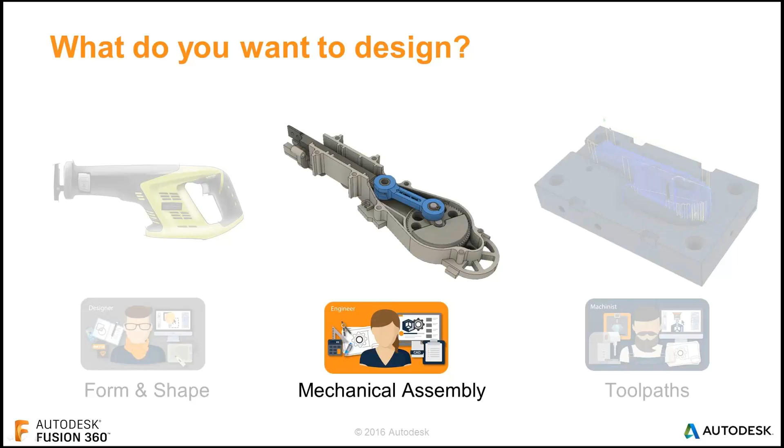So let's start off focusing on mechanical assembly. Today we will be focusing on developing the internal elements, or at least a couple of the internal elements, of the assembly of the handheld reciprocating saw that we did yesterday.

We will begin by creating a component. Now let's just talk a little bit about the concept of Rule 1. It seems to have appeared on the forums a few years back—the idea that you would start off by creating components inside of Fusion before you start building the geometry. You define the components. This is something I go back and forth on.

The reality, to my way of thinking, is that Fusion 360 is most valuable in its flexibility—the idea that you can start creating right from the outset without pinning yourself into a corner. There are definitely advantages to approaching things from the idea of creating a component, and we'll take a look at this more in depth in a moment. But a key element to keep in mind inside of Fusion 360 is the concept of bodies versus components.

Bodies are a collection of features. The thing you see on screen in blue, the crank arm, is a body. It's made up of some extrusions, a couple of fillets, maybe a hole feature. So the thing that defines the shape is the body. What makes it able to be joined in an assembly and have individual part drawings made from it is the fact that it has been defined as a component.

Now what makes that a little bit special is thinking of the context of the timeline. Just to plant the seed, when you look at the timeline of your overall design, yesterday we did everything in one space, so we had this very elaborate timeline. In the mechanical environment, when you look at the top level components, you will see all the features that make up that design, regardless of the number of bodies or components.

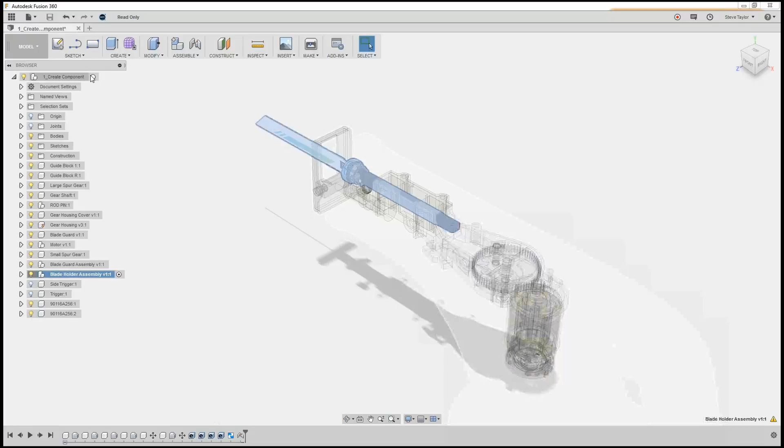You will see the timeline only displays now the features I used to develop this particular shape. And if I go back to the top level of the design and activate it - back up to the top to activate - click it, you'll see that the whole timeline comes back again.

So to create a new component, I have a couple of options available. You can create a component while creating geometry, a bit like yesterday using an extrude command or revolve command - you've got the option there to create a new component straight away. I can, in the assembly drop-down, create a new component here, and it tells you it'd like a new component, or you can go to any component in the browser.

Now if I wanted to on this, if I right-click, I can create a new component. If I did that, it would be a sub-component of that particular assembly. So what I'm going to do is make it under this top level. If I right-click, go New Component, you'll see in my browser at the side I've got this new component, and it is active - everything else is grayed out. If I click once, twice slowly, I can rename this. I'm going to call it Crank Arm.

Now I've got Crank Arm there. Even though the rest of the assembly is grayed out, you'll see as I hover my mouse, my cursor over it, you can reference anything that's in there. So I can pick up on an edge, I can pick up on a face. I have the ability to extract data from anything that resides within this drawing.

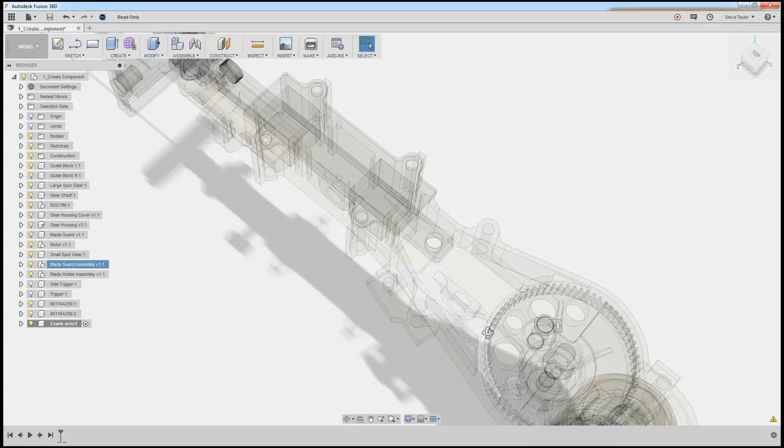The first thing I'm going to do, if I spin this round now, I'm actually going to create a crank arm between this hole here and the pin that resides there. And the way that it wants to sit, this is actually an arm that comes out, and I want to create a work plane mid between this face here and the underside face.

I don't particularly have a face that I can select for that sketch plane, so I'm going to use construction to develop a mid plane. So if I go up to the top, if I go into construct, and if I want mid plane, I can select my top surface of this arm as my first plane.

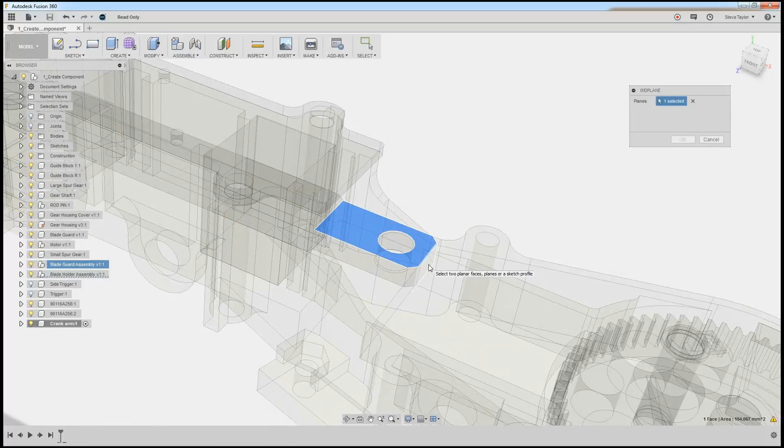Now to get my second plane, what I want to try and do is select this underside face. And you notice as I'm going across here, it's quite hard to pick that underside face. However, in Fusion, if I hover over this end one, select and hold, I actually get an option - I have a set that I can select down here. So I've released my button now, and you can see I can pick other faces that are close to that one. So I click that one there. It then has created now this mid plane between that top and that bottom face there.

And it's created that plane. Now let's start a sketch. So I can OK that, and we're going to actually start a sketch now. I'm going to be doing a circle, and I can pick my work plane, and you see it brings me right onto this work plane.

Before I said about picking up geometry from existing stuff, existing parts and components that are on here. So in Sketch itself, down at the bottom, we have a project option, and I'm going to project the inside of this hole here and the outside of the pin on that side. If I just spin it round a little bit, you'll see it's actually projected that sketch onto my work plane. So I go back to my top view and then press OK on that project.

Now I'm going to draw a circle, so I go circle, center diameter. Now again, yesterday I showed you the marking menu - what I could do, rather than having to go up here, if I right click, drag it down to sketch, and then go up to around about the 10 o'clock position, I can do center circle. Now that I've projected this geometry, I can pick up on that center, click once, drag, and I'm going to make this around about 20 millimeters. And we've got that fully constrained circle that's picking up on that center point.

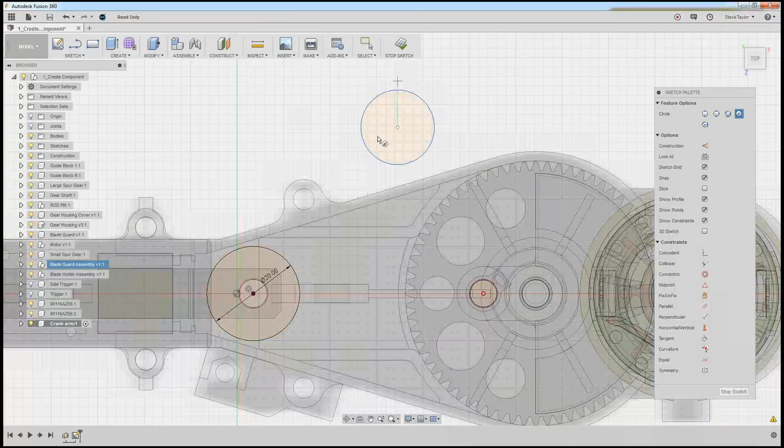Now you'll notice the shaded circle appears, and what Fusion also does, if you draw an unconstrained circle, the outline color is blue. So if I just was to draw another circle up here somewhere, you'll notice now it's shaded, obviously, because it's an enclosed area, but the outline of it is blue.

Using the sketch palette, I can pick up a constraint, so I can use the equal constraint, and I can say make this circle equal in diameter to that one, and you'll see I now get that circle constraint. I have to press escape to get out of my previous command.

Now at the moment it's still blue, because what I've got, I can still move it around, it's not constrained. I can pick up on this point, and I can just - oops, alright, held it for too long - pick up at this point and drag it. If I come to the circle there and release, you'll notice now it's fully constrained. We've got our constraints, and now I've got into the point, and the circle shape, it's gone dark.

You'll also notice the projected geometry, the colour of it is like a purple colour. So if I'm on here, the actual projected geometry, the centre, it comes up purple. So there is a bit of a colour scheme going on within Fusion that gives you an idea of

what is happening with each line that you're drawing. Now what I'm going to do, I'm going to connect these 2 points together, using the 2-point rectangle. Again, I could either come up to the top, or in the marking menu, come down and go 2-point rectangle.

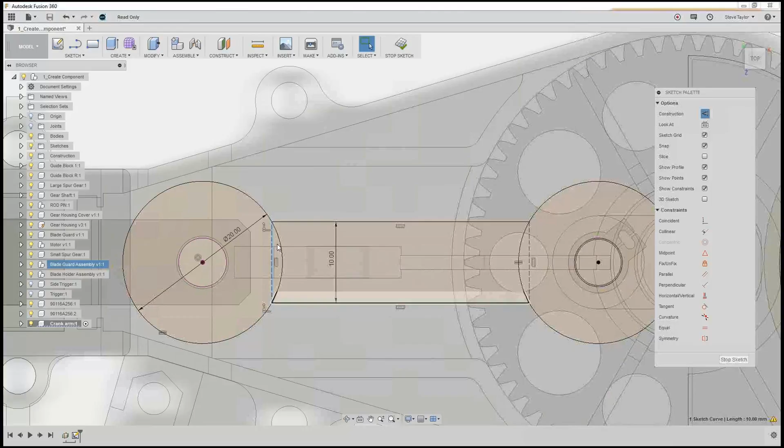So just press construct, click on the line, press construct, and it changes it. Click on the line, press construct. It gives me a blue pattern there. If I look at this now in 3 dimensions, you see how it's all connected up.

I'm going to now stop sketch. Now one of the commands that we're going to use today is the press pull. I can either put it into modify press pull, use a shortcut key Q, or if I right click, I've got press pull just there. Now at the moment it's just saying press pull on the dialog box.

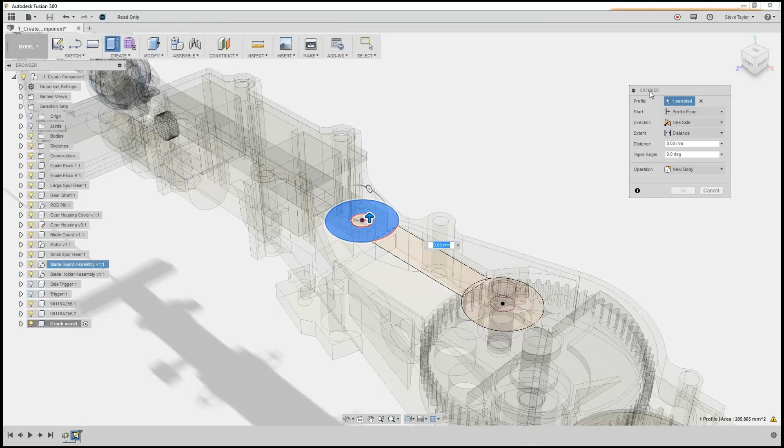If I was to hover over this circle and select it, you'll see automatically it changed to extrude. You can also use it to move faces or resize faces. It's actually a multifunctional tool, so it's pretty great for direct modeling. But it can also create features inside of a parametric model, and you can apply fillets with this same tool.

So we've grabbed this circle sketch, and what we can do is we can start to drag it up. You'll notice that we've got the same icons that we have with extrude before. We can start from the profile plane, we can offset it a little bit, or start from an object. We can go from one direction. We can have two sides where we can change one side and the other, or we can be symmetrical.

This one we're going to be symmetrical. We can either, the measurement that we put in here, can either just be half of it, or it can be the full length. I want to make sure it's the full length. And the distance that I'm going to put in here is 13 millimeters. I could have put a taper angle in if I wanted to. And you can see there, I can put a new body or a new component. We're already creating a new component, so I'm just going to leave it at new body and press OK.

Now, as usual, when a sketch is used for a feature, its visibility is turned off. So you see now that sketch is gone. But by going into the browser for this crank arm, if I open it up, you'll see I've got sketches. If I open up my sketch, you'll see that the light bulb is out at the minute for that sketch. If I click on it, the light bulb turns back on again, and now you can see my sketch, and I can select it.

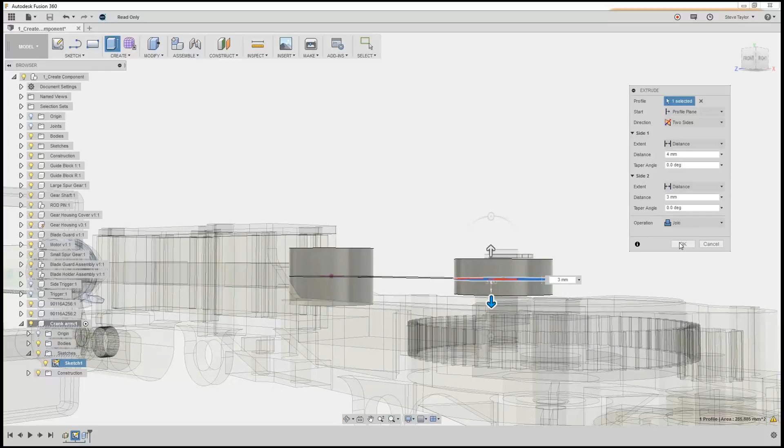What I can do, I can actually change this to join. Now even though they're not touching at the moment, because they are the same component we're working on, it will actually relate them both together. So if I press OK there, you'll notice the sketch still stays on.

For the middle, what I'm going to do, I'm going to extrude. Rather than use the press pull, I may as well just use extrude. Now I could go up to create extrude or use it from the top there, or I can just use the shortcut key E to extrude. Select the profile, and then as we're working down there, we will extrude it. Just let it check on my dimension, 6 millimeters symmetrically. So I'm going to do symmetrically, both sides, whole distance there, 6 millimeters.

And again, you'll notice it automatically went to join because the feature or the sketch overlaps some existing features, bodies that we've got in here. So it's automatically took that as a join command. Press OK. You'll see now we've got that there.

The key here is that with traditional parametric tools, where you have to declare things ahead of time - that this shall be a new component or this is going to be a new part - Fusion is different. It allows you to modify that structure. If for this arm I wanted to make it a welded part from 3 components, so this boss at the end, boss at this end, and the bar between them in the middle, I can come down to the timeline and modify each part feature to be a new component.

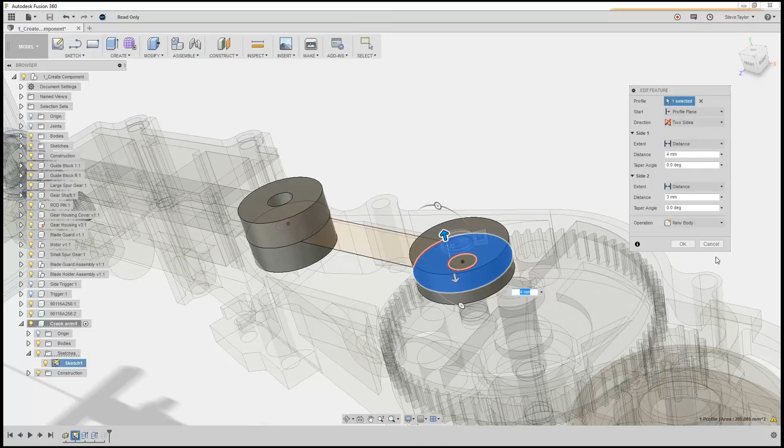If I want to change the size, want to change the distance, just double click it, dialog box. I can just change that to 8 for whatever I want to do. Change it from a join to a new body. And it does it automatically for me. So it is really a real flexible way of working.

Now what I'm going to do is turn off the sketch. So if I go back into the menu, turn off the sketch, and it's gone from it. I can just close that, collapse that down a bit for my crank arm.

This is where now we can use our press pull tool again. If I right click, go to press pull, it's asking me again, press pull. It doesn't know yet what type of press pull operation it's going to do. Selection, what I'm going to do is select this edge there. Now you'll notice straight away it goes to fillet, because Fusion, when it's seen an edge there, the type of edge it is, it automatically thinks it's going to be a fillet.

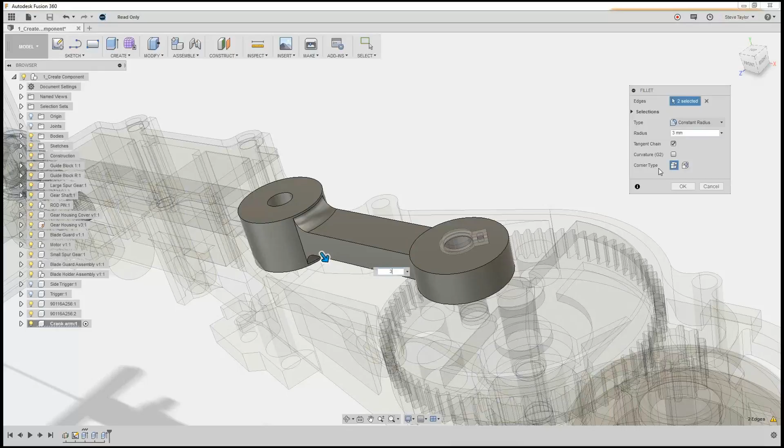Click again, the bottom face, and again I've got a manipulator arm, so I can actually pull this out if I wanted to. I've got a dialog box, so I can change that to 3mm if I want to do that. Again, on this side here, I can change it. So we've got our standard fillet operations that come in there.

So we spin that round. Now we were looking into this little bit here on this side. This time I'm going to select these 3 faces there, or sorry, edges. So again, I'm going to start the press pull tool. I'm going to select that edge, and if I hover around here, I can actually pick that edge as well. If I start pulling this out, and again, I can modify, and I'm going to actually put that at 3.5.

So you can do a lot of functions with this.

From a first-time user standpoint, it's really handy for helping someone who is new to solid modeling, who is probably going to be apprehensive with what they're trying to do. Being able to walk them through a simple exercise, we can use the same tools to develop some really cool shape. It's a nice way to introduce people to these concepts. It's a great way to break the ice and get them into being successful early on in solid modeling, without having to worry about the finer points of structure and creating a bunch of different sketches and doing all that sort of crazy thing. I think really using this is a really nice approach.

Let me do just a couple of other things here. First of all, I'm going to go to sketch, and I think what we're going to do is put a little bit of a point on here. Let me just turn this around a little bit here. If I go to sketch, slot, center to center slot, I'm going to pick on this face here. So again, I can just pick the face.

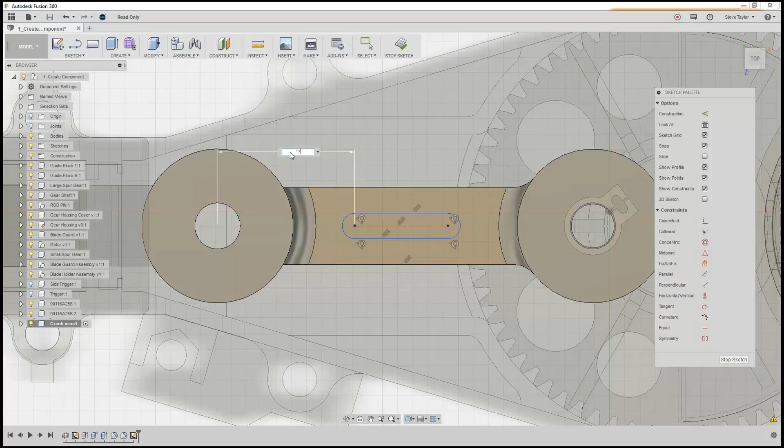And if we make that, say, 17 millimeters, it moves across that center. And then we do the same. Right click from that point to this center here, and make that one, say, 16 millimeters.

Pulls it out, and finally, if I click the outside of this, pull it down, I can make that 1.5 millimeters.

Now, one thing that I have noticed while I've been doing this, if I'm hovering around on this assembly and components, you notice how it's selecting stuff here. If I was to right click, see already it's selected that, press pull, it'll think I'm trying to do it with that part there. So what I need to do is either hover over the feature that I want to do press pull with, or if I just come off the model, right click, press pull, then I go into the selection type.

As you can see there, automatically it's picked up extrude. I've got my manipulation handles. I can start pulling it down. And for this one, let's just call it, I don't know, -1 millimeter, something like that. No, 1 millimeter. Let's do -1. We want a cut automatically, and okay. And we've now got this cut in there, which again is pretty cool and pretty easy to do.

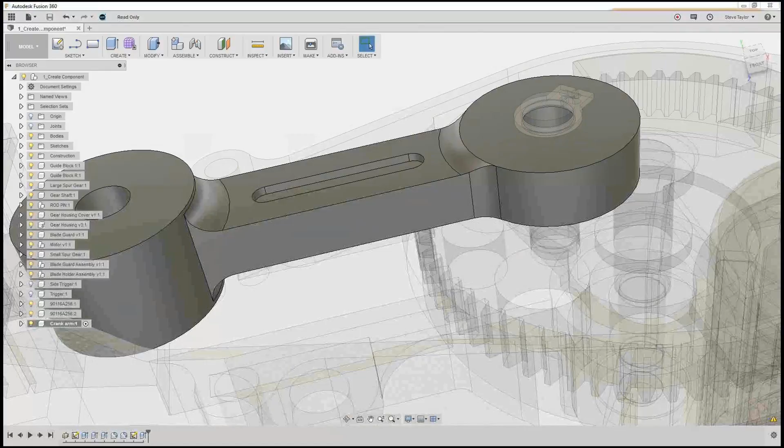Looking at some of the other tools we're going to create, we've got a mirror. Again, that little icon at the side, if we didn't see it, hover over it, you can add it to the top toolbar if you want to do. Click mirror. Now, one thing you may come up with, I was playing with this earlier on today, so that's why it came up with my last type of pattern type selection.

If I'm in faces here, I could go around and select all these particular faces to mirror. But this is a feature. If I click features, you'll notice if I'm hovering over my model itself, I can't pick that feature. However, if I go down into the timeline at the bottom, this is where I've got my extrude feature. If I click on that extrude feature, it actually selects it.

The mirror plane, select the mirror plane. I want the midpoint of my crank arm. If I just open it up, and in construction, you'll see I've got that plane that I created. I can turn it on if I want, but I can just select it from there.

Press OK, and we should now have another slot underneath. There we go. So again, pretty easy to allow you to do, and select these faces.

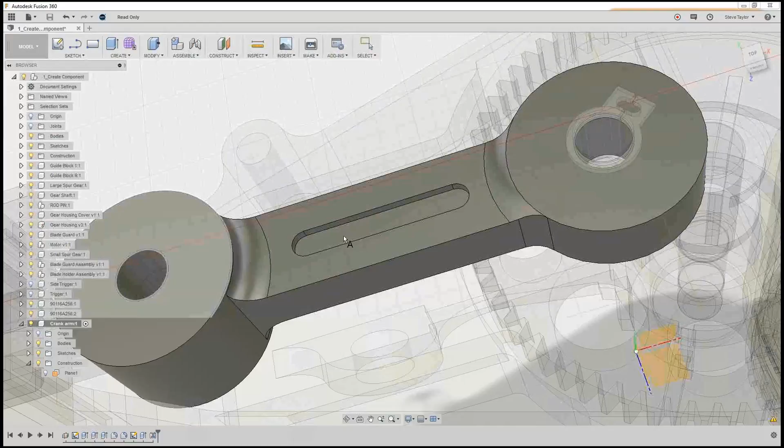Now the next thing I'm going to do is add some text in this slot. We go into the sketch, and we go to text. We can select the inside of the slot there. Zoom in.

You'll notice at this stage there's not much choice in how I can locate it. I've got this cursor that's coming up. So if I just click, specify the point for it, I can change the angle. I can type the text there. So I'm just going to type crank arm, see it comes upside down.

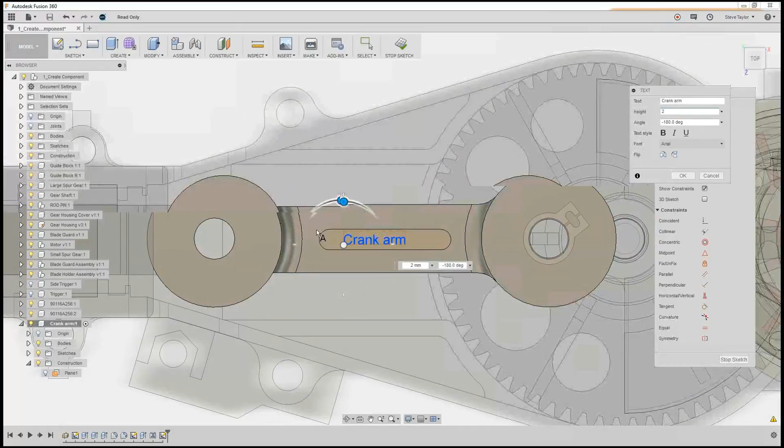I can change the angle of it there, spin it round, -180. I need to change the size of it, so if I make it say 2 millimeters, I can move it and position it.

I've got text style, I can make it bold if I want to do. There's a whole array of fonts that I can pick up. We do have access to a huge font library in there.

So once I'm happy with its position, I can then press OK. Right click off it, press pull, select the text, and again you can actually emboss it, or put it on the outside or internal outside. So I'm just going to pull this out, and bring it a distance of say 0.5 millimeters, join.

Okay, so very quickly there I've now got this crank arm with a bit of text inside, and it's pretty fancy. Not too bad, and I've not really had to use too many tools to create this. A bit of a sketch, and using push and pull as the main tool, I've managed to create something that's starting to look like a fairly decent crank arm.

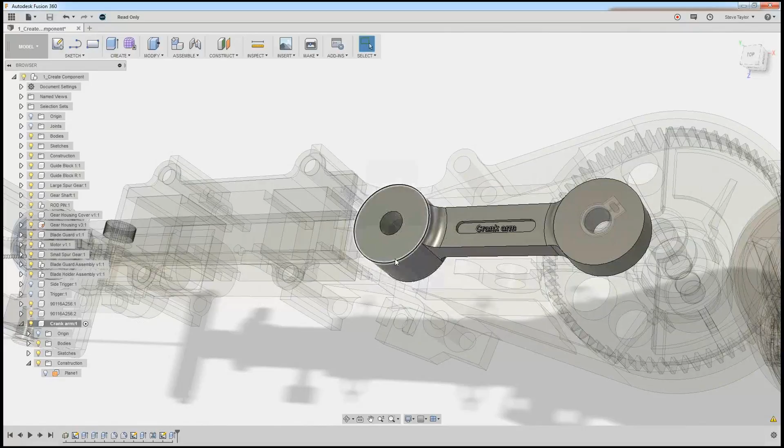Now, what we can also do is leverage other sketches. What I want to do is make a cutout now in this end, because there's an arm that goes through it. So what I want to do there is lever this profile of this sketch around here.

So I'm going to create a new sketch. Create sketch, and hopefully I can pick that face there, so I click that face. One of the things we can do in Fusion, a bit like Inventor, is actually slice on the sketching plane.

It comes up in our sketch palette, and we've got an option here to slice. If I click slice there, it will actually slice through my model on my sketch plane. So now I can actually see the arm that I need to make the cutout for.

I'm going to right click and do sketch project geometry. Again, I could actually go to sketch project geometry this way. I'm going to go that. What geometry do I want to select? So I'm going to project that bit, and then that bit.

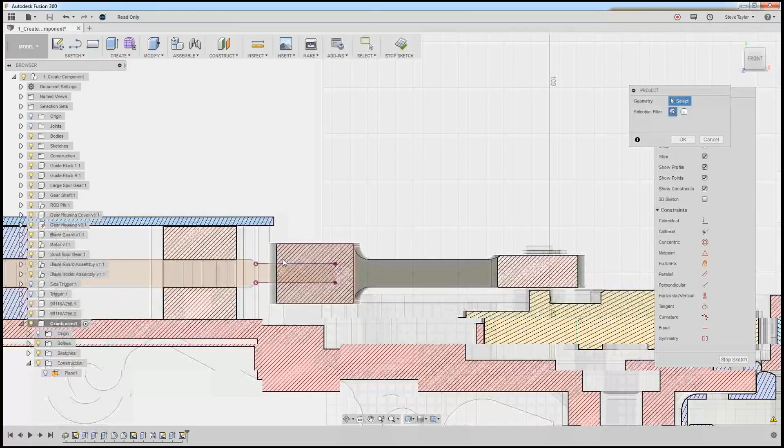Okay, if I go sketch now, what I'm going to do is a little offset. I'm going to offset these sketches that I've just done. Now you will notice if I hover over this arm, it picks up the full arm to offset.

If I hover over it again and hold the left mouse button for a minute, you'll see I get this chain. So I actually have an option of what chain I want to pick up from there. The first one is the whole arm, the second one is just the bit that we want. So if I select that, I'm going to leave that at 1.

Okay, and then using the L command for line, I'm just going to join up these at the end to make it a complete profile.

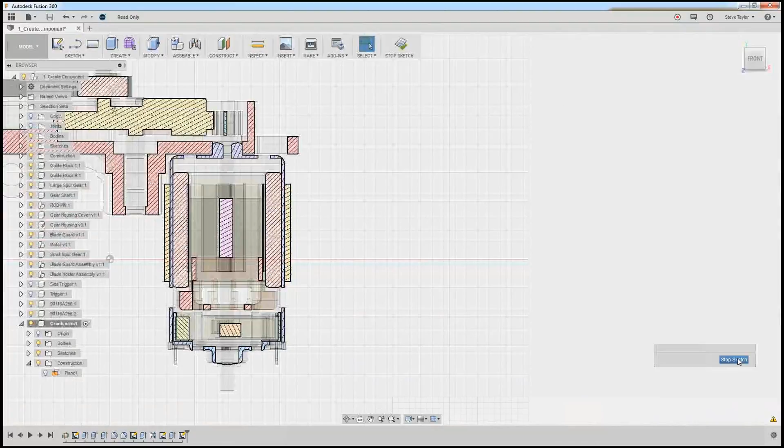Just like before, I'm going to now right click, press and pull. Now you notice because I did that whilst I still had the slice on, it's kept my model sliced. So if I just cancel out of that and turn off the sketch, we'll remove that, or I could just take the slice off and it would remove it.

Right click, press pull. I can now select pieces. There we go. Where is it? There. And that part there.

And you'll see we're now into our extrude again. Now one thing you will notice as I'm extruding there, it will actually cut through the case. So if I was to go symmetrical on both sides, you'll notice it's actually started cutting through other components. So I pull that out so it goes all the way through, and I don't want that.

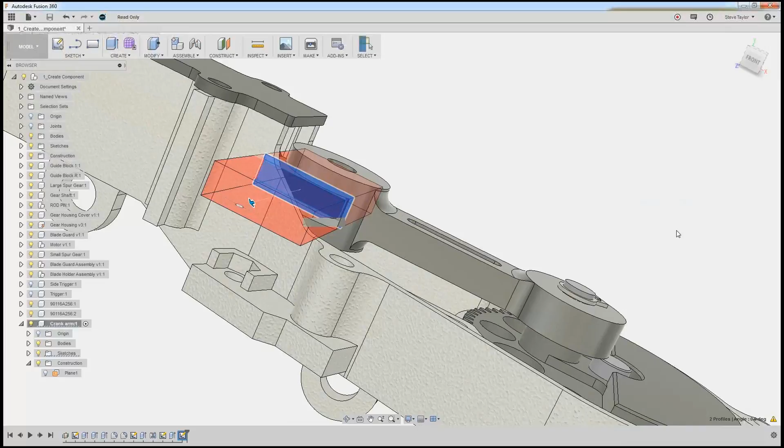What I can do here at the bottom, we've got an option for objects to cut. If I open this out, you'll see if I can remove the tick from the gear housing and from the reciprocating arm there, the casing, it will only now cut through the actual crank arm. If I go OK, it's now got this.

You will notice if I focus in on this front view down here that there is a little bit of collision between this arm and the end there. We could actually just use the press pull tool again, and if I was to just select that face, I can remove and pull that face a little bit further down.

And if I wanted to now, using the press pull tool again, I could actually add some fillets on if I wanted to do on the sides here, and press pull again. I can actually put some internal fillets in here if I wanted to. So it's quite a nice little tool for doing things like that.

So if I just zoom out a little bit and spin that round, so again, quite easy, quite a nice tool to use.

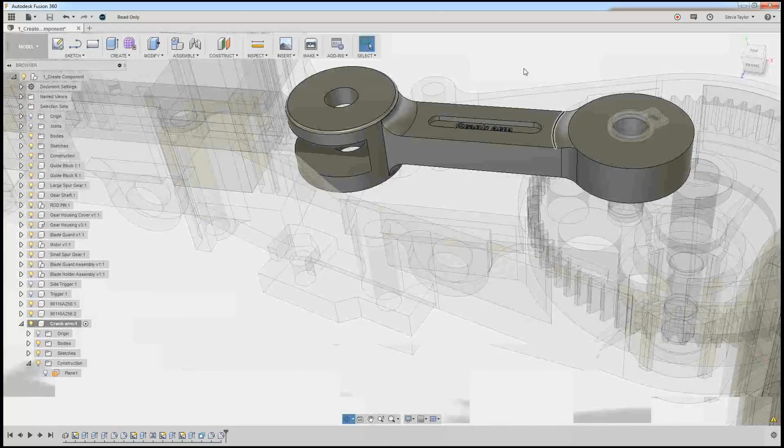Whilst we're in just this environment now, we've just created this component. What I want to do is just have a quick look at physical materials. Yesterday we looked at appearances and overrides, being able to change the colour of the model. Today I want to talk a little bit about physical material. I can right click, get physical material there and appearances there, or by going into the actual component itself at this corner, right clicking, I can go physical material. Again, it looks very similar to the appearances box we looked at yesterday.

You've got the ability to change and look at different libraries. So you can have your favorites library or non-linear material library. We've got ceramics, and if we go into metal, we've got lots and lots of aluminium before we get into the copper and other bits.

What we can do, if we wanted to make this into now, say, an aluminium, just go back up again, into aluminium and drag and drop. It's now changed the appearance to match the aluminium appearance. It's changed the colours, and it's actually put the material up into this design. And if I wanted to change anything, if I double click on this box, sorry, I might have to just move it over again.

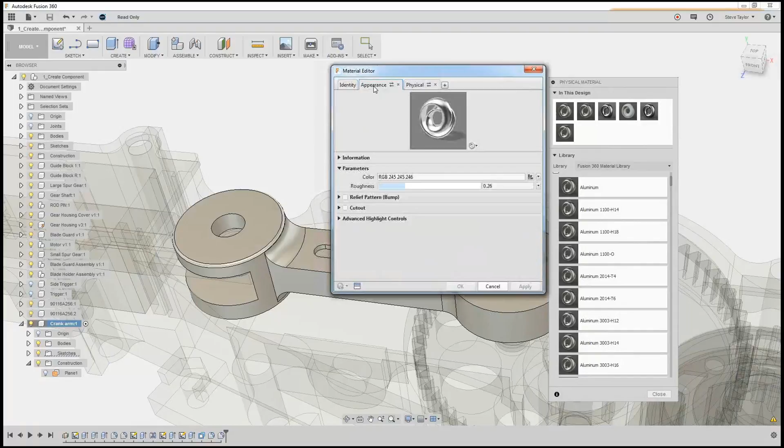Double click on this box, I can actually change like the density, get into more information about the material itself. So I can change the colour and physical appearance of it. It may or may not change the appearance much, but we have the ability to make these modifications.

You can actually copy the materials as well and create your own library. Some of the materials are non-linear, so when we get to stress analysis, depending on the material, it will allow for a different type of analysis. Some of them may not be downloaded, so you may have to download.

So again, if you're scrolling down in the library, you would get a little arrow at the side, a little down arrow with an underscore line, and that would indicate that it would need to be downloaded. It's just a quick, simple click, and it will actually download for you. So that's really just materials.

One of the things you may get if you're ever doing the ACU exam is, whilst a lot of the questions need you to measure something, whether it be the volume, the mass, or an area. If it's an area or a distance, you can use the inspect tool, measure, and just highlight something, and it will give you the loop length of that sketch, the area of that particular surface that you've got there.

If I come into the actual arm itself and right click, then go into properties, depending on the material, we've got the area, we've got the density, because we said it's this aluminium, so it's picked up the density from there, and it gives us a mass and a volume. It tells us the physical material that we're using, and there's lots of other stuff there, centers of gravities and information that you can pick up.

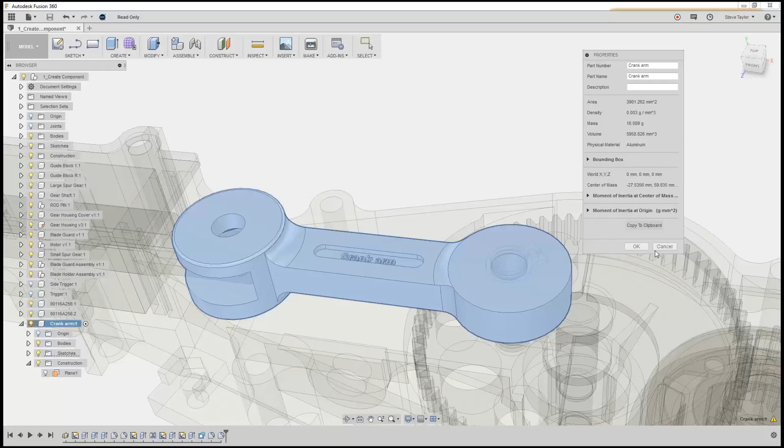So if you're ever actually doing the exam, what it wants you to do is type some information, usually out of the properties box or from the inspect. So that's just a little hint there when it's looking at stuff. So just cancel out of that.

Moving on a little bit, that's what we've just done and created. It's on this PowerPoint, a lot of it, so this will be made available to you. We've done the demonstration. The next thing we're going to look at is importing and editing existing components.

This is working from existing geometry. One of the things Fusion has the ability to do is pull data in from just about any other CAD system. Any translation, say a SolidWorks part, CATIA part, or Creo part, is done in the cloud through the upload function. So the same process you might use to go into a project, click upload, and pull in an existing Fusion file can be used to pull in data from other sources. Some of the standard formats, STEP, IGES, etc.

These can be pulled directly in by saying create a new design from file, and I'll use that process as well. Once the data is put in, if it can be automatically stitched into a solid, or in the case of a STEP file where it probably already is a solid, you have the ability to go ahead and just do direct modeling and make modifications to that geometry. You also have the ability to turn on design history, so modifications made to that model can be tracked and edited. Let's take a few minutes and walk through the process.

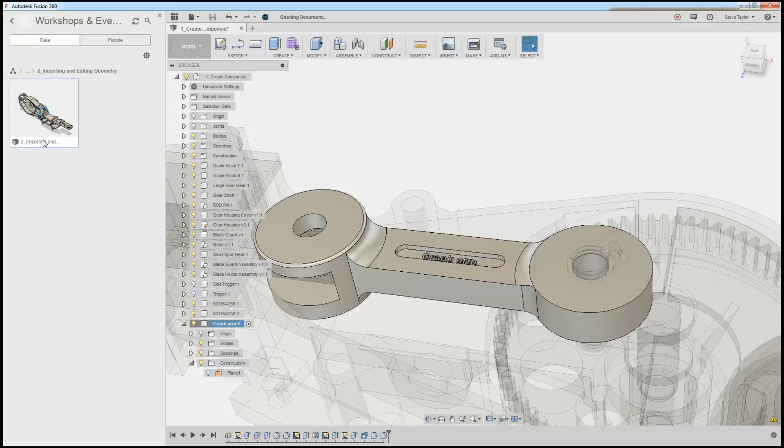So I open this, we have the file here that you can edit. But to show this technique, I have an IGES file saved on my hard drive. What I've done is upload this. But what I can do is go File, New Design from File, and what I've got on my hard drive is an IGES file, which you can see there. So I'm going to open it.

So this should now... it's opened this untitled one, which is exactly the same file, but what I've done is actually imported this one from my hard drive. And you can see it actually opened it pretty quickly, and you see it's been able to stitch it into this solid model.

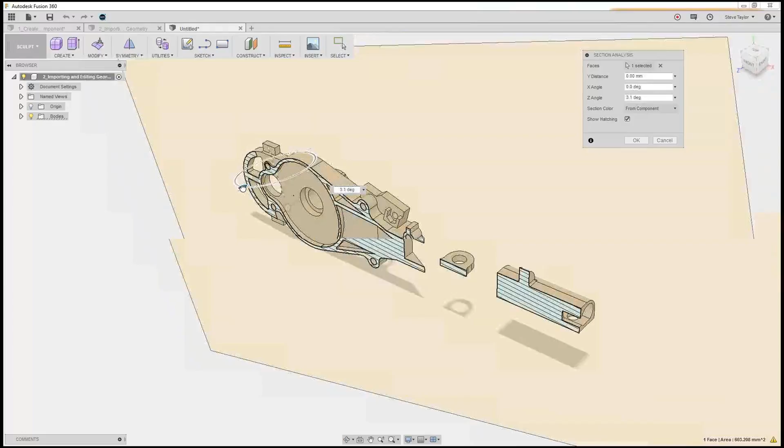If I wanted to check it was solid, I go into Inspect and go into Section Analysis, pick up on a face, and there you can actually see it has brought it through as a solid. I can spin that around, and you can see there we've actually got a solid model from that IGES file. It's a very quick and easy way to actually check that.

I'm taking a look at the body. There's lots of different things that probably need to be tweaked on it. So let's spin this round a little bit. There, we've got a couple of ribs there.

So looking at these particular ribs here, they might not be needed, and I may decide I want to get rid of them. If I select this face, depending on how I select it, I might get different results. If I select this face here and just press delete, you'll notice the whole rib has gone and the whole side has gone, which I didn't really want.

If I click on this particular face here and press delete, you'll notice it's actually deleted a certain feature, but it's gone all the way across. And if I spin it around just a touch and come onto this face here and now press delete, it just removes that particular feature, which is what I wanted.

Now, if I try to do the same on this side, just delete that face and press delete, it's actually done it, so that's pretty good. So what I've just quickly done now is modify that particular part of the model. Again, you can always undo if you've done that.

Now, one thing I am actually doing now, you'll notice I've got no timeline in here. I can at any time right click up here and capture design history and turn it on. So I've now actually got a timeline there picking up my base feature. I could have possibly undone the bits I've just done, but that'll be fine for what I need to do on this.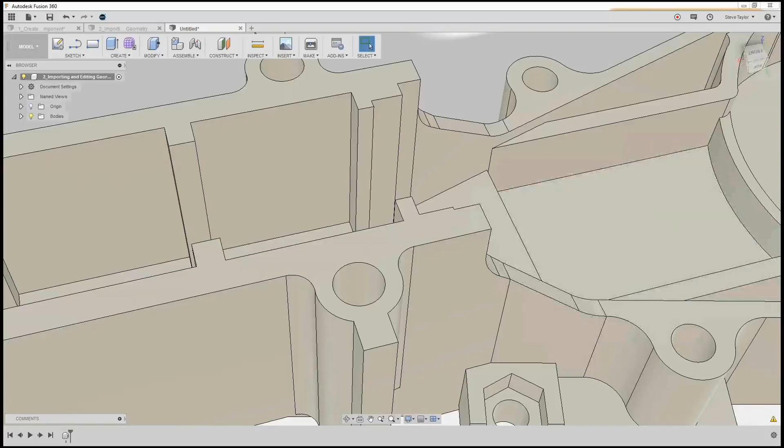Other things we can do, again, if I now move to, let's have a look, somewhere on here where we can do something. Let's spin it around a little bit. There we go. This particular feature here, yeah, maybe it's not the result I wanted. So we can play and have a bit of an experiment.

So if I click that and press delete, you'll notice it goes sharp. Same on this side, click, press delete, it goes sharp. So I'm actually now modifying this existing model.

If I was to right click, press pull, click on that edge, you'll notice I can actually change the size of that now, and it's actually putting it in as a fillet. I'm not so sure if it would have recognized it as a fillet initially, but now that I've deleted it, I'm putting it in a fillet. So it's actually making it tangential as well, because as I'm doing it, it's making sure that that is a tangential fillet to that side.

So I could actually make that, say, let's have a look what it looks like at 20 millimeters. It's a nice smooth curve. Press OK on that, spin it around slightly, then pick the same edge. Right click, press pull, same edge, and again I'm doing the same. So I'm able to modify these edges, make it more to what I want it to be able to do.

If I then look, I want to move now to the front of this, so let's come along there, let's zoom into the front here. Hopefully a lot of this is getting a feel for the actual tool itself and how it works. If I move to the front end of the model, I want to get rid of this notch in this face, this little notch here.

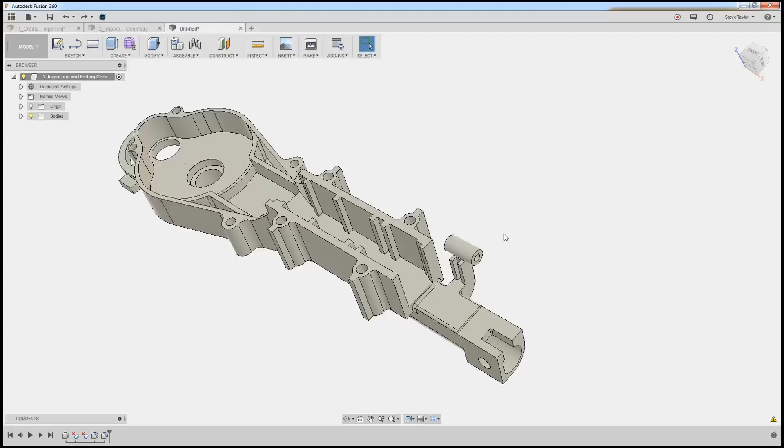Selecting the little face, so if I was to come here and just select that little face there, if I can pick up on it there, and press delete - I didn't like that. Let's try again. Select, come here, we should be able to select that and press delete. Oh, it's deleting 3 faces more. Didn't like that, let's undo, undo.

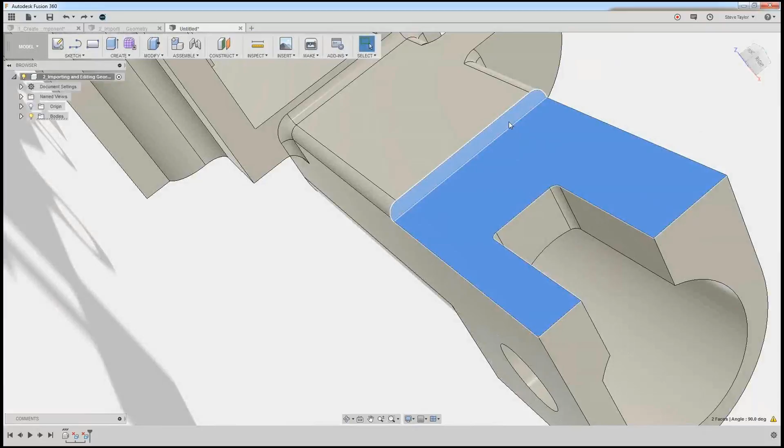If I actually, that's what it is, it doesn't like it because it doesn't know what it wants to do, but if I select possibly that face and press delete, there you go, that's what we wanted. So again, it's a bit of experimentation, trying different things, and it didn't work by pressing one face or the other face, but by actually pressing both. What it's done is actually got rid of that notch.

We can also change selection options. For this, I'm going to use the move copy tool. What I'm actually going to do now, looking at this, is try and make some modifications here. For this, I'm going to use the move copy tool. So if I was to right click and go move copy, what I want to do, I'm actually going to do some modifications on here.

I could here, if I wanted to, select bodies. So at the minute, if I was to hover over this, I'd be selecting the whole body. It allows me here to select components, faces, and sketch objects. So if you have sketch elements you want to move around, you can use this same tool. For this, I'm just going to use faces, so I'm going to change it to faces.

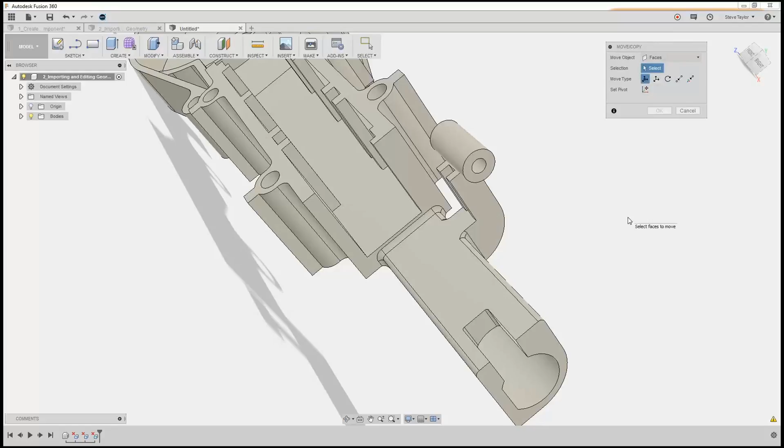For this, I'll use window select to select the actual cylinder faces and the two faces connecting to it. I'm going to spin this around a little bit, and hopefully I'll window select that.

Then using the manipulators, I'm going to move it down 3 millimeters. If I spin it around so you can see what's happening, you'll see I'm actually able to move it down. I could move it across like yesterday when we were doing the sculpting. It's the same manipulators—I can spin it round and do all those types of modifications.

So if I wanted to spin it, I'll do it anyway. There you go, I can actually spin and modify that round. I'm not going to do that, but I'm going to move that down a little bit. If I press OK, yep, it's made that quick and simple modification to it.

Again, with very little effort, Fusion's done it all for me. Now if I want to do something a little more drastic, I'm going to use the move copy. I could find it with the M shortcut, or in the toolbar in the modify toolbar, or since it was the last command I used, right click and it's just at the top.

This time, I'm going to select a few more of these faces. I'm going to select this face and this face, and let's see if I can spin this round a bit and select that face as well there. So I'm selecting a little bit more this time.

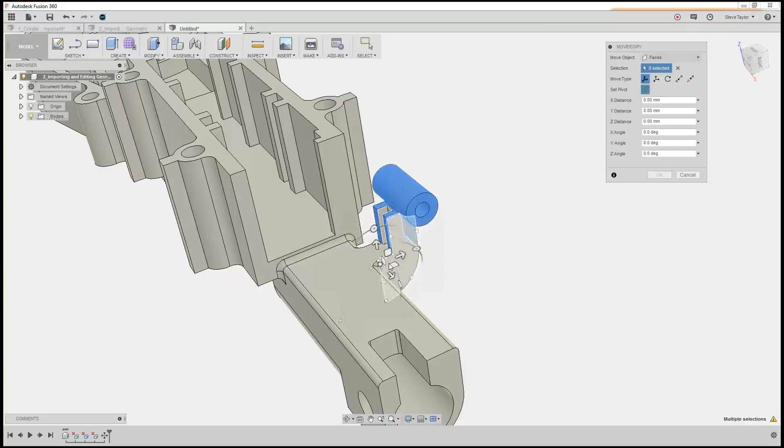Now one of the things I can do is actually set the pivot point. Up here, if I go into pivot point, I can select where I want to move this from. If you notice, hovering over a side brings up different icons: a triangle for the midpoint of a line, a circle for the end point, and a square for the center of the shape.

I'm just going to pick on, say, that point there. Now, one thing I need to do once I've set a new pivot point is come back up and say done—so that's my new pivot point. And then using this, I can actually change and modify it.

Now you'll notice one of the things I haven't selected there. So let me go back into my selection and pick—oh no, let's go back. Let's take that back to zero, because what I want to do is select that other bit. So put that to zero.

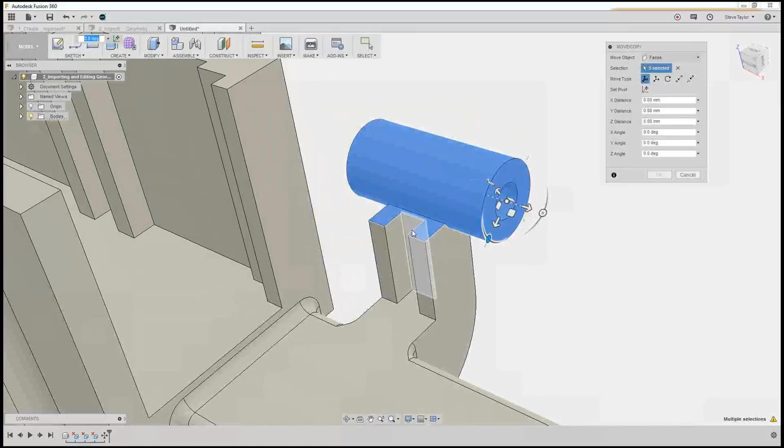Let's go that. What I want to do is select them, that, and hopefully spin it round. Select that one. Yeah, set my pivot point to that point, tick it, and then what I can do here is, there we go, move it and spin it round.

Let's put that as minus 22 degrees. Minus 22 degrees, press OK. And you can see quite a drastic change now in our model. But it's been actually pretty problem-free, pretty simple to do. It's a lot more complex than just sliding a few faces around or deleting a fillet or two, but it is pretty simple.

Then moving on, let's have a look at another part of this model. Let's spin this round—maybe here's something we can do here. We have a couple of ribs that are missing an opportunity to add some reinforcement around this particular hole, so that these ribs come to this rather than actually coming near this hole to give it a bit more reinforcement. So if I start the move copy again, repeat move copy.

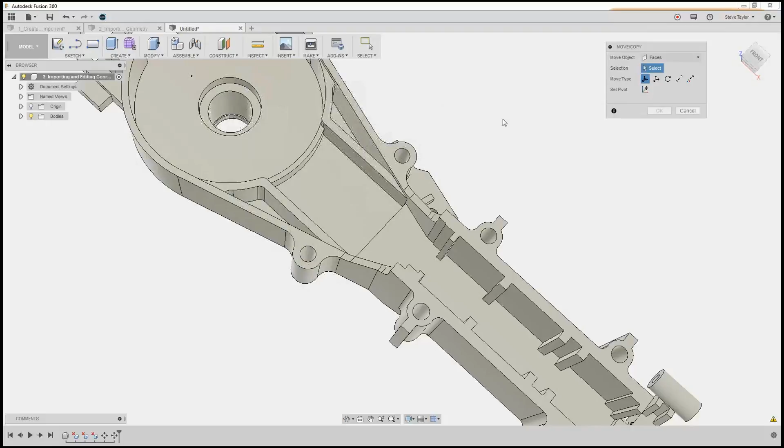What I want to do is select the pivot point to be the radius center, so I want to make a pivot point there. I'm going to zoom in here, set the pivot point, and I want the pivot point to be—let's see if I can pick this up. There you go, I think that's picked it up there. Yeah, so it's picked up that pivot point. And tick that.

Maybe I need to select the inside face first. That's what I've done wrong. Let me X that and start again. Always something. Pick that inside face. Hold on, cancel that, start it again. Repeat move, faces, select.

Select that particular face, select the pivot point. The pivot point wants to be the center of that, and then hopefully I might need to click done.

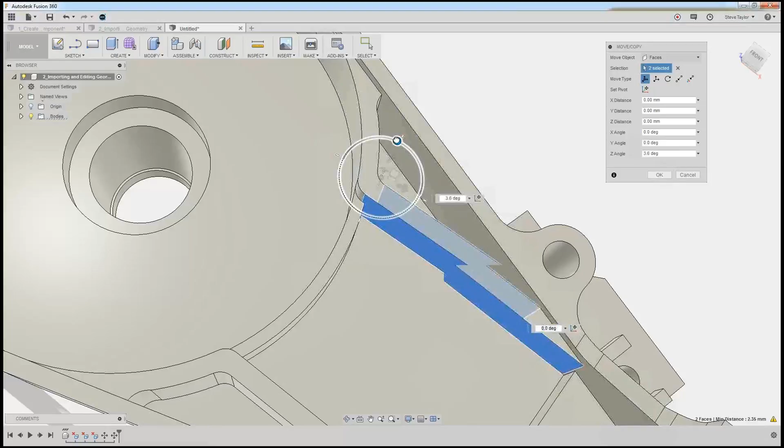Now you see it moves that, but not the outer. So what I need to do is select that outer face as well. And there you go - we can quickly modify and move that around. So we've got that one. Press OK, so you can see how quickly that was to modify and change.

We could look at doing exactly the same on this one. So right click, repeat move, select that face, and that face. We want to set the pivot point to be around about the middle of there. Oh, there we go, that bit. Click the tick, and hopefully we can move it.

I think the distance was around about 6 that we put in there before, so I change that to -6. So we've got a way of modifying and changing - again, a dead quick way of doing it.

There's a lot of opportunities to be able to load in some really old models that you've got back from years ago, and modify them and save them and move on.

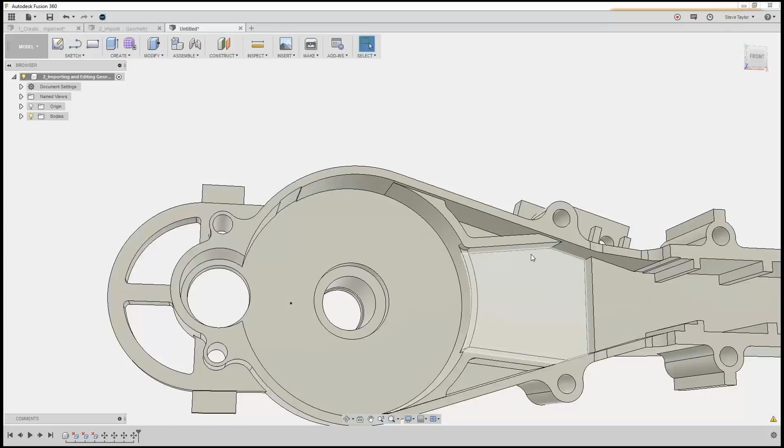One of the last things I want to show on this model - let me come to the actual front of the model, spin it around a little bit, and if I select that front face, I use the press pull.

Again, we can just press pull that backwards and forwards in there. So you can use the press pull on any of the features.

But what we can also do is right click, move and copy. If I select this front face, you see all these selection points that come up. When I talked about moving the actual pivot point, if I come up to this top surface and select that surface using that point, that becomes my pivot point. So I can now modify and change the angle around that pivot point.

So again, it's pretty easy, and it's a pretty quick and cool option to be able to use. You can simply just grab it, move it - it's just another way of working with it.

I could also pull it from there using that move and copy tool. I can do planar, but because of the particular type of geometry, you can see what's happening - if I'm not careful, I'm filling in that hole. So with different pickups, that's not doing anything to it. It's one of these things where you play about with it and see how it affects the actual model.

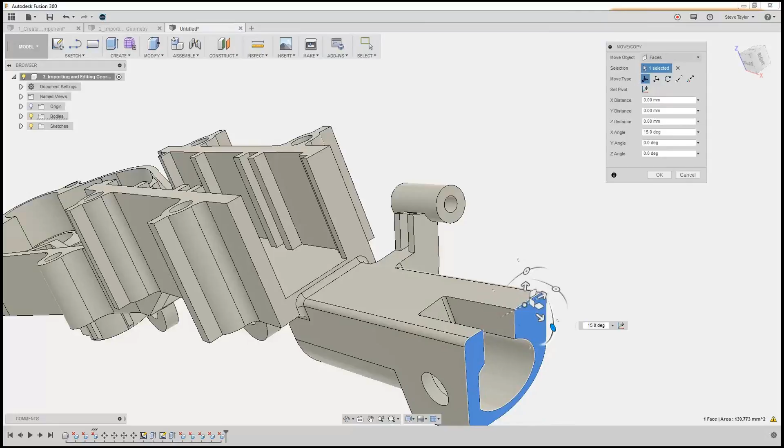So that's really just importing and editing existing geometry. This is all in the PowerPoint as well, so it gives you an idea of what you can do and what you can't do.

If we then go on to the next bit, which is about bodies versus components - this should take us up to about a 5-minute discussion, and then about half an hour more showing joints and assemblies, and then we'll have a bit of a break.

So what I'm going to do is start a new design with a quick sketch. I'm going to start a new design from scratch, a quick sketch, just go a rectangle there, and I'm just going to extrude that a certain distance.

By default, this comes up as a new body. If I press OK, yeah - if you take a look in the timeline browser, I've now got that initial sketch, and I've got that extrusion that I've done.

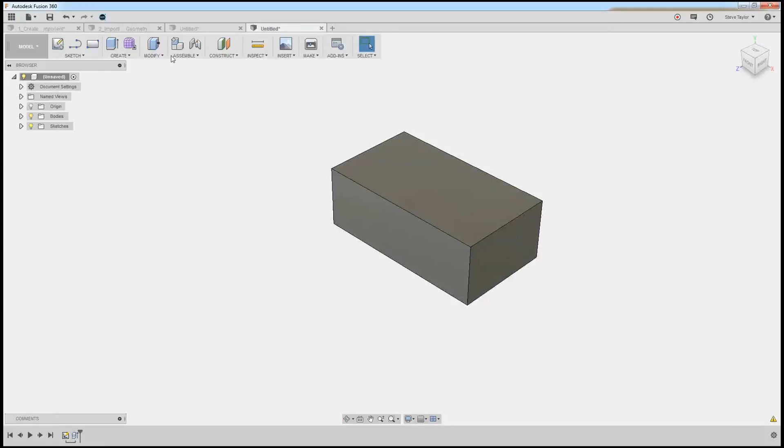Maybe add a few more fillets, so if I wanted to modify, just add a fillet in there on a few edges. If I wanted to, you can window select as well, so you can pick the whole object - sorry, because I've just deselected them - and add the fillets, press OK, and it adds that fillet to the timeline.

You can see this feature has now been added to the timeline at the top level of this component. This is because I've done these actions in this component. It's very important to think about this top level not necessarily being an assembly, but as a component, so it's able to do things like create drawings from the features and bodies that have been created.

You can see my body in the folder. You can turn it on or off. So in the folder here, the bodies, you turn the body on or off.

If I now want to start building an assembly, or something I would think of as an assembly, and wish I had really created a subcomponent to the design of this box, you can still do that. There are a few different techniques, some a bit more elaborate than others, but this is a fairly straightforward operation.

If I right click on the top level, I can select add component. So here I can add a new component, and it creates a new component in there. I can name that component if I want, so if I wanted to name this as box, I name it as box. You'll notice now at the moment there is nothing in there.

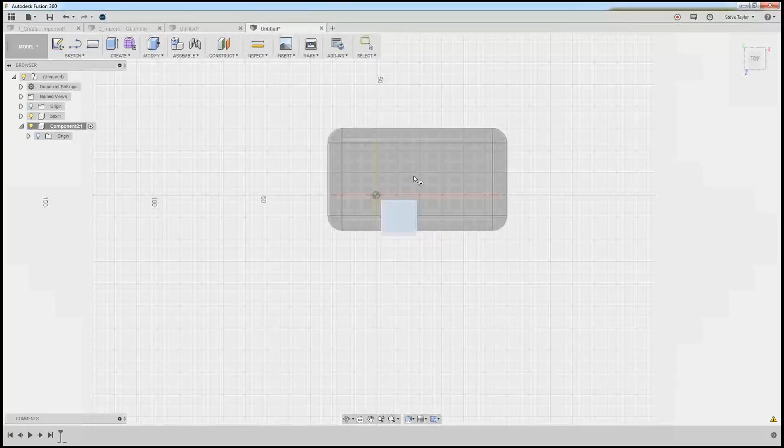If I add another component, so if I now go and add a new component, and I call it component 2, I'll leave it as it is. You'll notice now that's active. If I was to do any sketching here now, say this time I'll do a circle. I'll sketch a circle, stop sketching, and just extrude that circle. Not too bothered at the minute.

Okay, that body for this has been added to this component, and the only thing that I'm seeing in my timeline down at the bottom is this component. If I was to go back to my box and activate my box, you'll notice this has now gone to just the box feature. If I go all the way up to the top and activate all of it, I get everything being shown. So each one of these is its own separate feature.

So if you're in a hurry, and you say we need components to do joints, drawings and stuff, if I've been in a hurry and just done a concept design using bodies, I can go back and create a component from the features. I can create it from the bodies, and always move and add them and create what I need - the bodies and the features and the sketches for a particular component - and move it around in the folders to correspond to what I really needed. So you can always go back, it's flexible the way that you do it.

If you're in a hurry and forget about rule 1, and forget to create components at the beginning, you can go back later and tidy up your design.

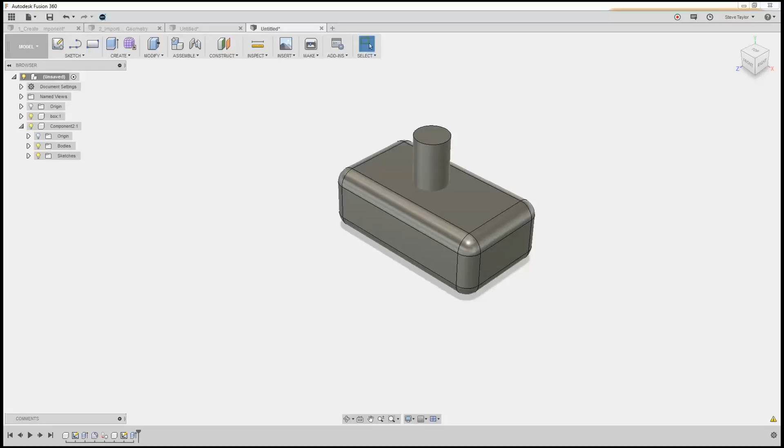Going back to the previous model, one thing I don't think we covered anywhere else in this shortened adoption course is adding a thread to a component. So very quickly on here, adding a thread - if we go over to the hole in this component here, go to this part, and we go create thread there, it will automatically pick up the nearest closest standard size to it.

We can modify the thread with the drop down boxes, but what is really interesting for those of you doing additive manufacturing or 3D printing, this currently is a nice looking thread. Yeah, if you look at that, it looks like a nice thread. If I went OK, it looks visually nice.

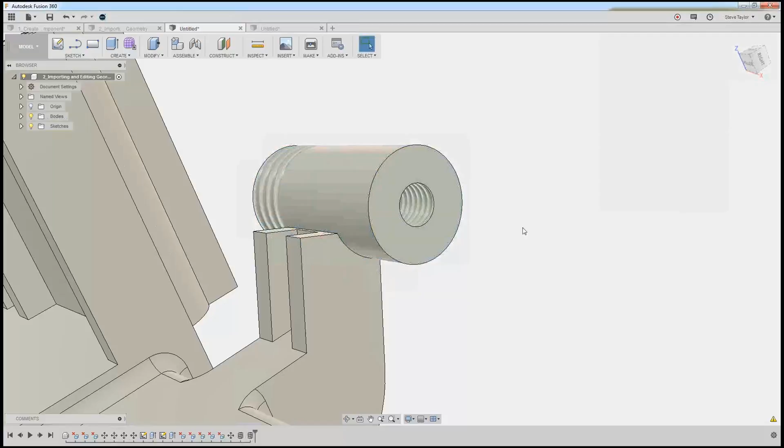And if I wanted to, I could click on this and go create, and create a thread on the top part. That might not have to be full length - maybe I only want it part length, so I could put something on it. Go OK, and visually, looking at that, it looks okay, but it is only currently visual.

However, if you're into 3D manufacturing, additive manufacturing, 3D printing, the problem is when you go to print it, it's only visual, so you won't end up with a thread. But one of the things that is optional in that thread tool, if I went back to this outside one, here is to actually go modeled. And what this model will do, if I press OK, it will actually give me a physical thread model there.

So having this option for 3D printing is essential, because we want some clearance in the thread with the expansion and contraction with the 3D printing process. Using the press pull tool, you can pick up on one side of the thread face and pull it slightly. If I press pull, I can come in here, pick up on one side, and if I zoom in, I can pull in just a touch to the 0.01 of a millimeter. Okay, and that's now given me a bit of clearance on my thread.

So there's a lot of cool things you can do within Fusion. That's what we're going to do - we're going to go to assemblies and joints, and to be honest, it's a real nice exercise, and I really like the data sets for understanding assemblies and joints. But before we do that, there's a couple of things to think about when it comes to assemblies and joints. So we'll move just quickly back. Here we go.

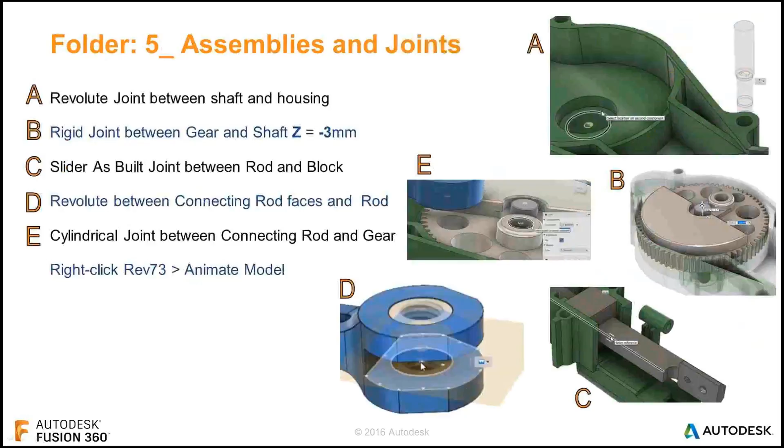Make sure we're in the right one, so go back one. The first thing is that you need to have components to be able to apply joints to them, but joints themselves are a different creature.

I don't know how many of you have tried, those that are experienced in Inventor, using joints in Inventor. If you did and it seems just a little awkward or off, there is something really important about joints in Fusion and Fusion 360 to think of compared to constraints.

When applying an assembly constraint, you are working from a position of the assumption that all degrees of freedom are available. So when you're in Inventor and you're starting to put constraints in, what you're doing is actually removing the degrees of freedom. So you apply a mate constraint, which removes the freedom of the parts to move apart from each other. You then might add a flush constraint to align it to a side, and then another flush constraint to align it to another side, etc., until you have removed all the degrees of freedom on the two parts, so that they're in position and they move exactly like you want.

The way joints work, or the way joints look at things, is the assumption that you will be removing all the degrees of freedom at once, and then we'll come back, and based on the type of joint you select, you will be telling it what degrees of freedom you would like to release. So it seems a bit subtle, but in application you'll find that you need to apply fewer of these controls, and they are just smarter.

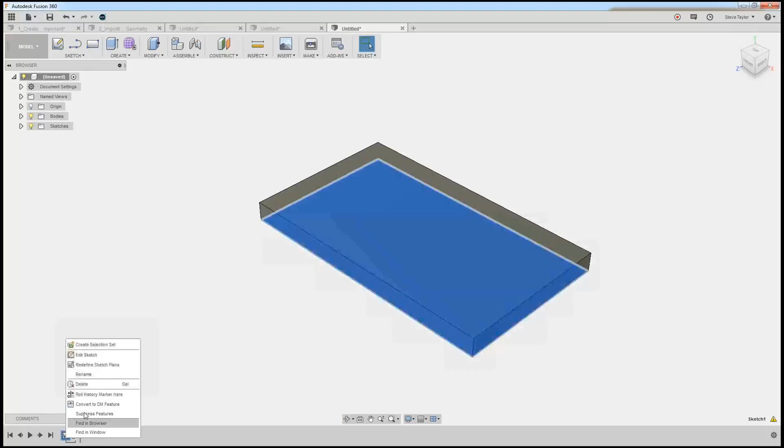Now what didn't I do? I didn't create a component first, which is a little bit annoying, but I'll do it properly like I should. So I'm going to click on that and delete it, delete, and delete that. Delete my timeline, right click, new component, just call this plate 1.

Okay, so now when I start, draw my rectangle, there, extrude up, say around about 10 millimeters. Yeah, they just want it to be a new body. Actually, I could have gone new component when I was actually in there, so yeah, I just did something.

Now what I want to do is make a second component that I'm going to attach to this. So I'm just going to create a new sketch, try get another way. Sketch, 2-point rectangle, this time let's do a rectangle. I'm just going to put it on there. Extrude that upwards, but rather than join, if I go new component, make that 10 millimeters. There. Okay, so I've got now.

I didn't actually put that as a new component, so let's do that. Change from new body to... it doesn't give me an option there to create it as a new component. Let's just cancel that.

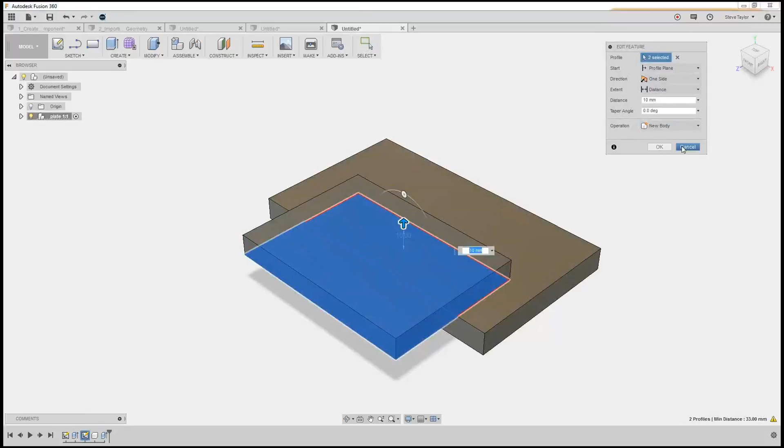Let's open it up. Have I got... so I should have 2 bodies. Got 1 body, is that one? Component 2, it's put it underneath that one. Yeah, because I've got plate 1, and because I didn't create it there, it's put it in there. So maybe I can move this and move the level of it.

There we go. So as you can see, I created that component, but I had it at the wrong level. I'd actually created it underneath plate 1. So all I had to do was click and drag it to my top level, and it's now created it as a separate component, which I can highlight there as plate 2.

Now, what you've got to think is how would you fix these components in position? So say I wanted to, just highlight and activate the top level again, so we've got both of them. So I've got 2 plates, plate 1, plate 2.

Thinking about Inventor, maybe I wanted to add a mate or flush these faces, or mate these 2 faces, then I'd have to align or flush these 2 faces to get them lined up. What I can actually do in...

Fusion, in Assemble up at the top, I can actually do joint. Now, one of the things I need to do prior to using the joint is actually ground one of these components, make sure that it's fixed in space. Otherwise, it doesn't know in 3 dimensions what's being located to what.

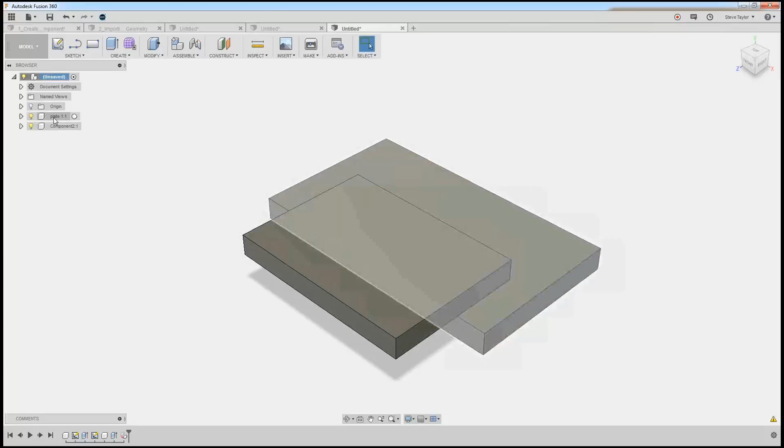My first plate, if I right-click on it, I've got a ground option. Click on the ground, you notice I get the little pin next to it. That means now that is fixed in space and I can't move it. This one I can pull around, this one I can't. So I've now moved that, moved it around.

If I go to the joint tool, I'll just capture that position where this is at the minute. Now what you will notice as I hover over each one of these faces, I get different selection points and different sort of options here. So if I wanted to have a flush face, I could actually pick this point here or this side underneath here.

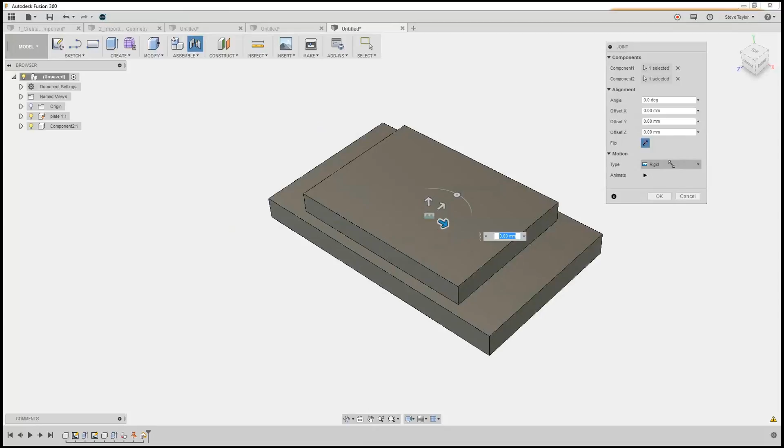So if I said I wanted that to be with that point there, it automatically comes as a rigid fix. I've got my manipulators, so at this moment in time I can spin it, I can move it, as well as having the options to do this here.

I can move this around. I can even lift it off, so I can actually join something, but with a gap between it. I can do all that here.

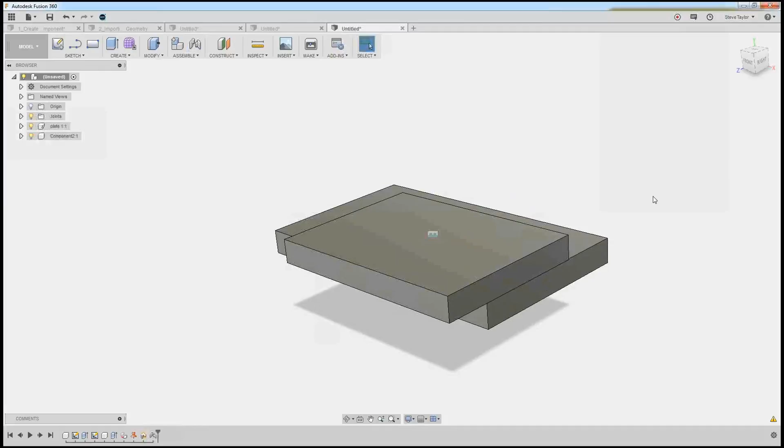I could change the type, so if I went revolute, it asked me what axis do I want to actually revolve that around. But I'll just go with a rigid at the moment, and I'll just move it out and spin it around to there. Okay, and that's actually now joined together in that position.

Yeah, it's now fixed. So how does that compare to Inventor and using constraints, in terms of the amount of time?

Let me explain grounding again. If I remove it, let's unground this.

So what happens now, I'm going to actually remove these joints as well. Let me just delete that joint. So at the minute now, I've got these objects. Let me just remove ground, unground that, continue. Right, so I've now got these two plates that I've drawn in a three-dimensional world, but at the minute they can both move relative to one another, or independently.

Nothing is actually fixed. So if I was to start to try to assemble these two components together, which one would move to which component? Would one move to the other, or would one stay still and the other one move to it, or would they both move towards each other? We've got no reference to work to.

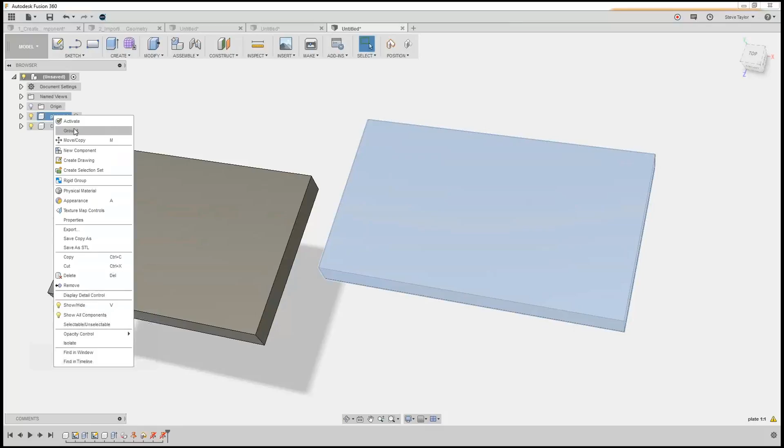So what grounding does, it actually fixes one of our components in its location and says that's where it needs to be, that's where it's going to be fixed. So with this plate here, if I ground that - I've right-clicked on it and pressed ground, and capture position - that's just where it is. Now if I try and select it and move it, it doesn't move. This one does still, but that one doesn't. So I know now, once I start applying joints, this one is going to move to this one here. So I've got this physically fixed in this location.

Again, Assemble, joint. I'm just going to capture this position here. Hovering over this edge there, if I was to click that one, which is the rotate part there, and that edge part there - these are both located together on the midpoint.

I can spin that round. I could change it to a revolute joint. As you can see, I'd have to remove some degrees of freedom in there, and I just move that to 0. There, and then just move this out a little bit and across a little bit. I can very quickly put in some dimensions there to locate something solid, and then press OK.

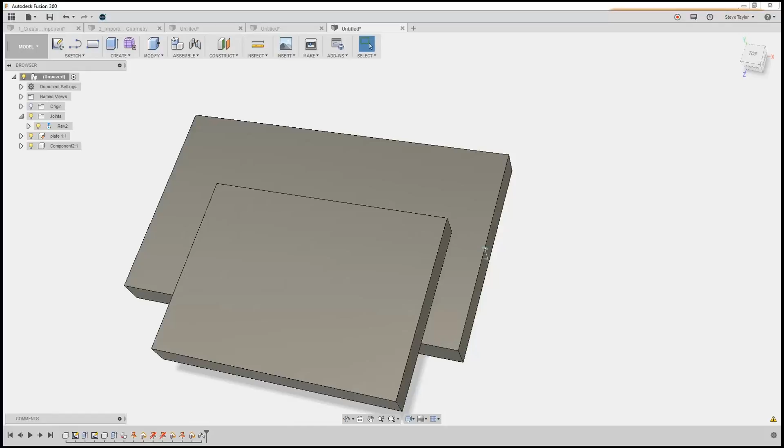Now, one of the things we can do - this is if I'm building something and I'm not so sure exactly if it's going to work, or whether the concept I'm designing is going to work - we can actually do something called as-built joints. Just to show this, I'm going to quickly create a new component.

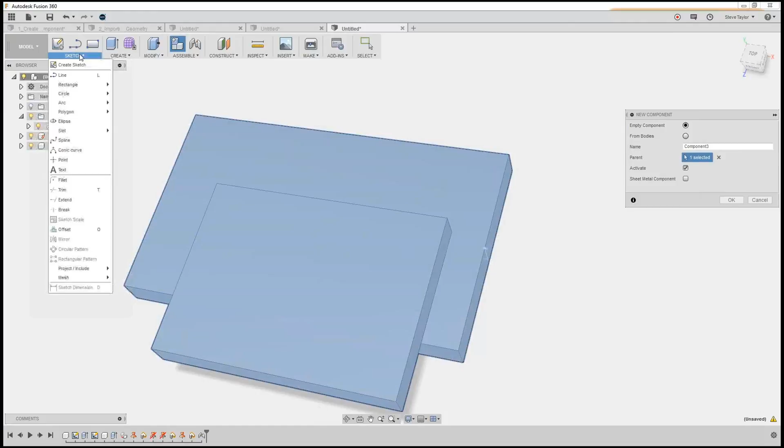So, sketch, assembly - let's try this. Assembly, new component on this top surface here. Component 3, empty component. The parent wants to be top level. And circle, center diameter on that top face. So if I was to position a circle, something like this, start sketching, extrude that upwards.

You see it's added another component in here, and just to make this a bit clearer, what I'm going to do here is draw another - let's do sketch, rectangle, zoom in. I'm just going to overlap that a little bit. If I then press pull that bit and just move that down a little bit. Okay, so what I've actually done now is created another component on here that I've got in position, which I think might work.

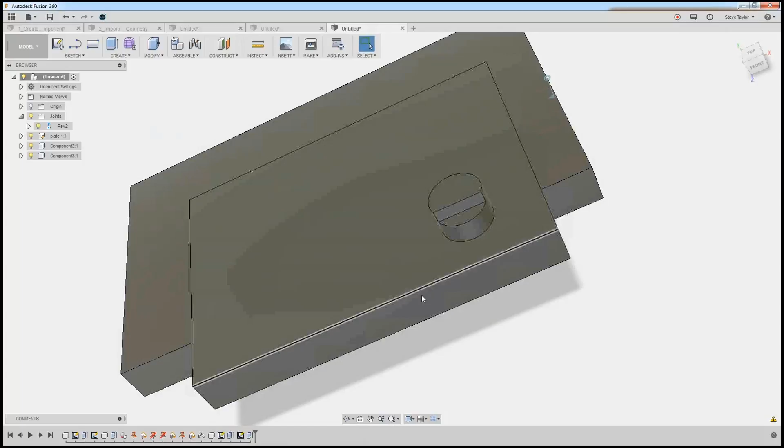The only thing is, what I want to do is test it. So I've not put a hole in anything yet - this is just prototyping. What I'm going to do now is create an assembly as-built joint. Select the components, so select the one that's going to move first, then that one. Position is that center there, and it's picked up a revolute joint there.

Okay, so now what I've actually done is put in an as-built joint. It recognized that it wanted to be a revolute, and I should be able to pull this round. Which one's it picked up on? It's picked up on that one. Let's suppress that joint in a minute - let's just pick up on this one. Press that.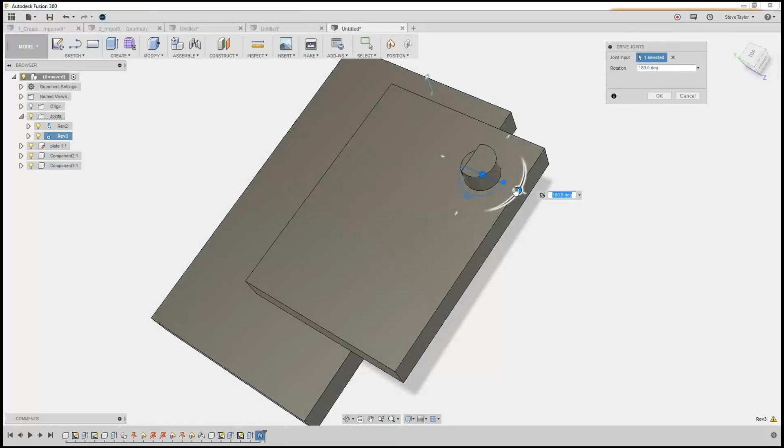So this has now picked this joint, and what I can do is actually drive that joint - I can spin it round, and I can make sure here, whilst I'm doing this, that before I actually make any more modifications and changes to my plates, like I'll start drilling holes in, I can see whether it works like I want it to work. So that's an as-built joint in there.

Now, just before we have a break, I'm going to quickly look at a very quick exercise with these joints. The data set that we'll be using now is a nice one.

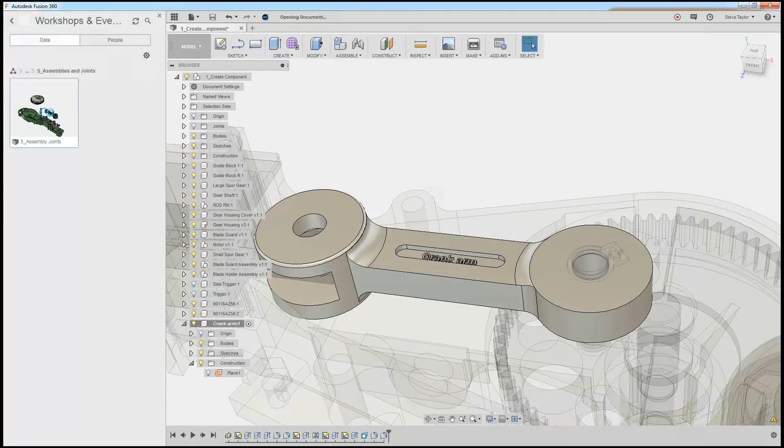When it loads up, as you can see, we've got all our components. We can see the one that has been grounded, so the gear housing itself has been grounded, the green one. And what we've got here are some components: we've got the pin that's going to go in the center, the gear that's going to go on the pin, and finally the crankshaft and its bits and pieces.

So I can go straight away to the joint tool command. I could go up to assembly and joint, but you can see there's a shortcut: J. So I just type J, go straight to the joint.

We're going to select the bottom of the top section of this pin. I'm going to select this pin here. You'll notice as I'm going up and sliding that, I've got other points coming up there. This is actually a midpoint of this particular section. Where in other software you've had to create construction geometry, construction planes to pick up things like that, in Fusion itself you've got these extra little bits to help you. So if I wanted to do a midpoint sort of joint, I could do there.

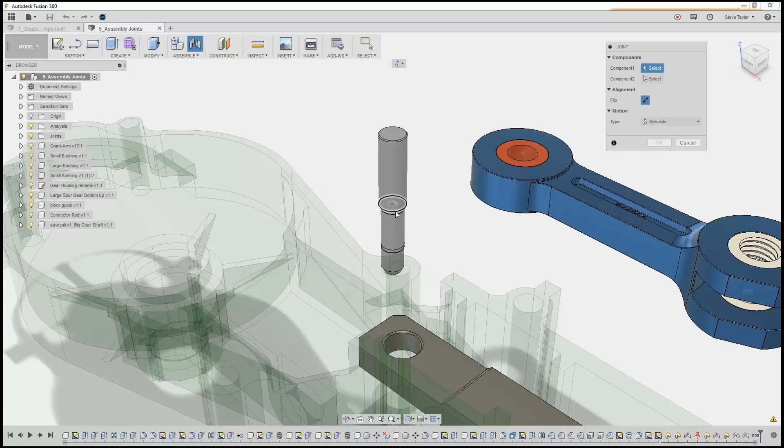With this one, I just want to select this center there, so that bit. And what I want to do is join it to the top there, so if I select that.

Now you'll notice it's picked up my last command that I used, which was the revolute. I think for this particular case, that's all right to use here. It will pick up the bottom there, and we just want a revolute, which is the last one. It animates it a little bit - we can press animate and it shows it in there. If I press OK, that's now moved and it's in position, and it's the exact point where I want it.

Now, what I next want to do here is put this onto this. Again, J for joint. As I hover over this, you'll notice that it can get quite difficult to select exactly what I want.

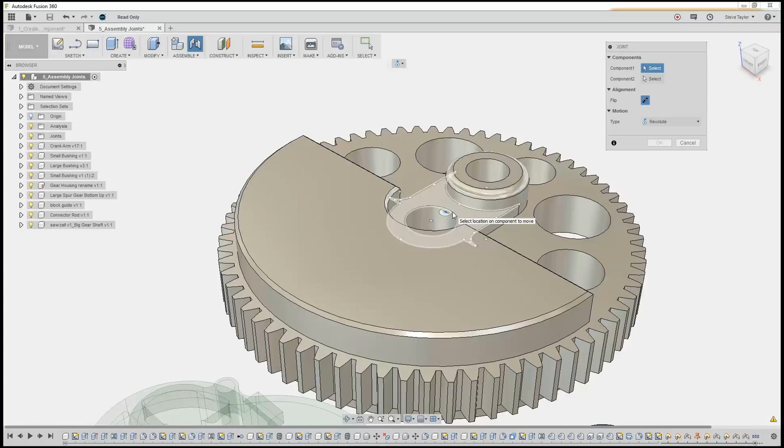But a little hint: if you hover over the face of something, this face here, and I want to pick up a point, if I hold the Control key down, you'll notice no matter where I move my cursor now, it just leaves up this selection set at the top. Or if you're using a Mac, it's the Command key. I can isolate my selection to be the only point on the face. So I'll select the center of the hole now, clicking that.

I can then go to the pin, go to the top of the pin, and select the top of the pin. You'll notice there what it's actually done - it's actually spun it round. So what I want to do is flip it around the other way. So you've got a flip option there.

And rather than being revolute now, I want this to be a tight fit. Watch what happens to these when I click rigid - it shakes, so it's a rigid joint. But also what I want to do is make this a push fit, and I want it to be 3 millimeters lower down. So if I start dragging it down, again I've got the dialog box that comes up, or also in here I can just type 3 millimeters and OK.

So I've now OK'd these two things together. Now where geometry can be a bit more challenging, I've just showed how you can isolate the selection set using the Control key. But what about where there is no geometry for you to select?

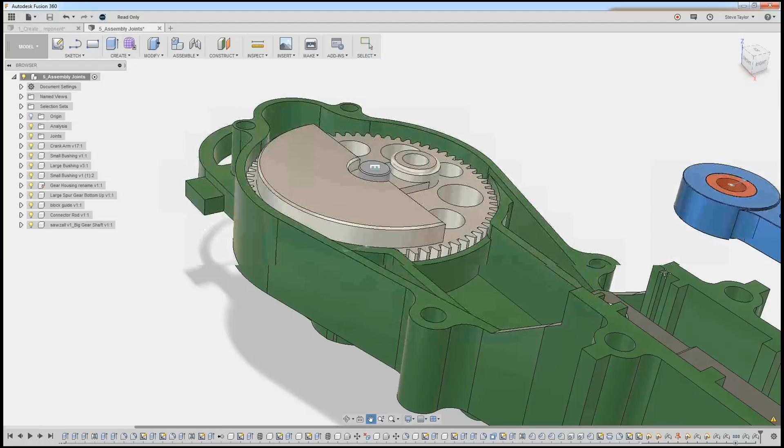If we look at the front end of this crankshaft, let's see if I can spin this round here. So the crankshaft here, the arm itself, let's move it down. Ideally, what I want to do when I'm joining this part is have the midpoint between that face and that face - sorry, the underside face there. I'd want it to line up with the mid face or the work plane of that face, and that face there, so I'd want it to align midpoint to midpoint. As you can see, I don't think there's much that we can actually select there.

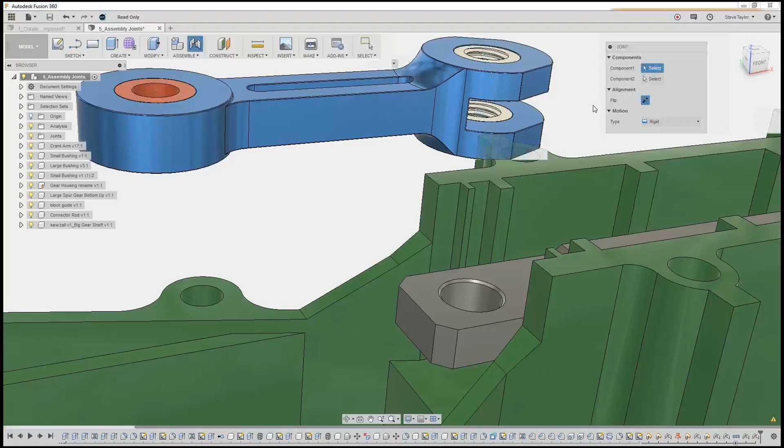Now, what I'm going to do is show you a way that we can actually select between two faces. And the way that I'm going to do that, we're going to start the joint tool - J, joint tool.

If we start the joint tool and then right click, there is actually a between two faces option. So I'll just show you that again. We've started the joint tool. We're hovering off so we're not actually selecting anything at the minute. If we right click, we've got the between two faces option there.

Now you notice when I deselected it then, so if I select it again, this allows me to select the first face. Then let's see if I can get under to the second face there. So I've now selected that. Let's see if I can get around it somewhere. So there you can see now we've got this.

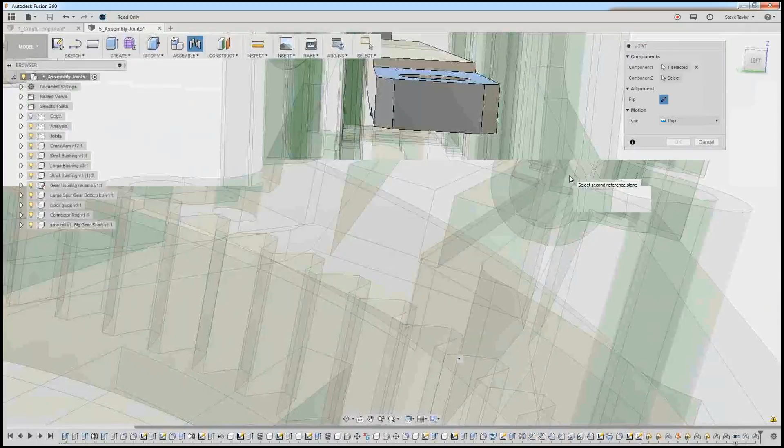And then we can select, and then hopefully in the second component again, if we can do between faces, between two faces, between that face - well, we could do between two faces, but actually what we can do on component 2, if I remove that between two faces option. I've just come out of that, sorry.

Let's go back into it, right. Escape, joint tool, let's do this again now. Component 1, right click, between two faces, for that face, and let's see if I can spin this around a little bit. Let's do it this way.

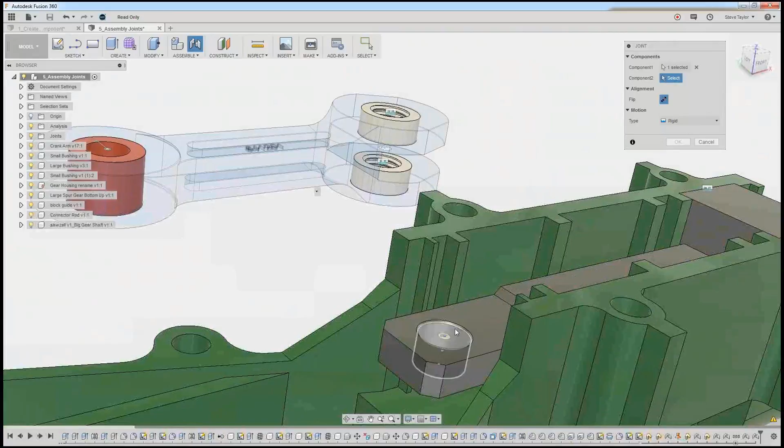And that face. So now we can actually, you can see there, we can select that point I think we've got. Yeah, you can see where it's selected it, that midpoint. With the second component, what I'm going to do is, if you remember here, we've actually got a cylinder going down, and we can actually just move down to that midpoint there.

Now that's rigid. We don't want rigid, we want a revolute. You can see that's now got it in position as we want it. So it took a bit of doing that, but we got there in the end, and it showed you another option, and then we can press OK.

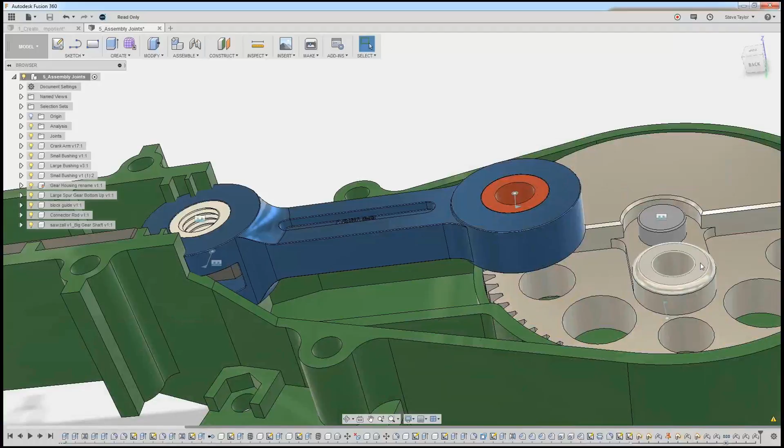So we've now leveled that up, and you'll notice that the bushes come with it as we've done it. And then finally, what we can do, we need to actually line up this with this. Now, if they don't line up, there might be some sort of gap between the top of this boss and the underside of this face here. So the joint that we can use for this, we just use joints, and I want that one and that there. If we actually, rather than using a revolute, use a cylindrical joint, which means it can go up and down in that direction. If we then press OK, now what it's done...

There's something that's not been fixed at this end. Just hold on. Let's move this around here. What we've actually got here is this that's not been fixed in position. That's why it all moved then.

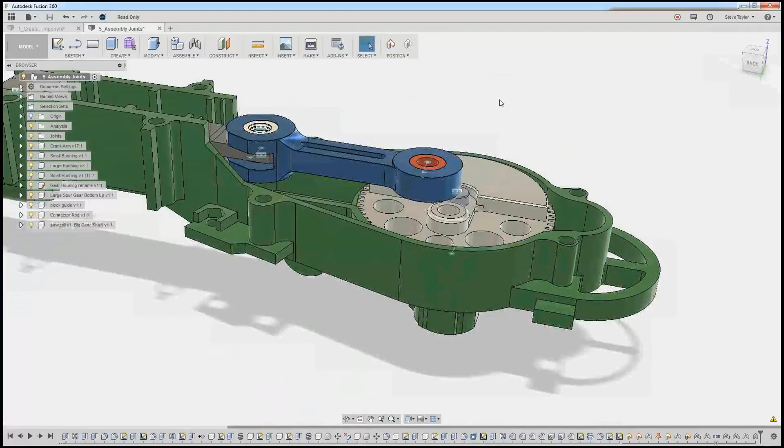So what I need to do with this is, in Assemble, As Built, that component and that component. Position is that one. It wants to be a slider. So, like that move, there we go. That's better, that's now fixed in there. So now that we've done that, let's just see whether we can go Joint, catch position.

Let's click that one and that one. Press OK, and there we go. So we've now actually located that, and we've got that now in position. If we rotate that, you'll see that it will actually rotate. Now, one of the things we can do, we can actually animate this a little bit from this.

If we go into the joints and we look at the first Revolute one that we did, which was the very first one, right click - is it animate model, animate joint? That's just the animate joint. Sorry, stop that one. Let's get from that. Right click, animate model. There we go, sorry, animate model. It's just picking the right joint from the top there.

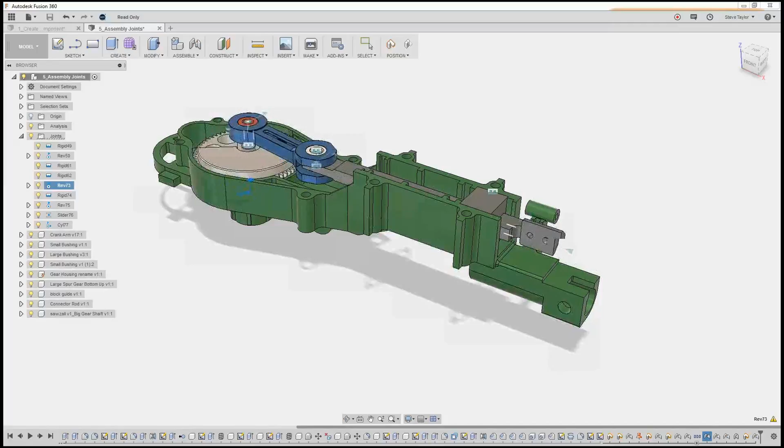So you can actually animate your model and see how it works. And which is great. And then it'll just keep animating and moving until we've done. And that's it, it'll basically run until you stop it. So to stop it, I just have to press escape.

It stops. We can also select any joint and set joint limits and set a rest position using the reset option. So in here, there's lots of bits and pieces that you can do. So you can edit the limits that it moves to. You can lock it. You can actually drive the joints.